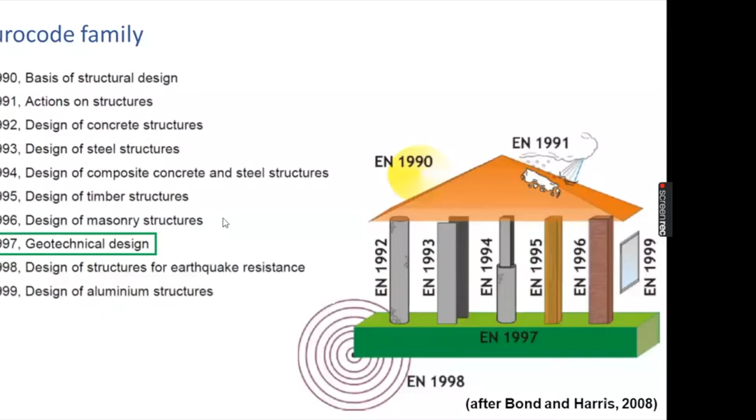So EC7, as I said earlier, is based on the limit state design philosophy. The previous design approach that we are quite familiar with is called the working stress method. In the working stress method, the resistance is calculated, estimated, and a factor of safety is applied to obtain the allowable stresses. But in the limit state method, the design approach is different. Material parameters, and what we call loads in EC7 as 'actions' - that is the terminology used - are given proper weightage by applying partial factors for permanent actions. Variable actions are given different weightage by applying partial factors, and the loads or actions are increased using the partial factors.

Then the resistance, in the calculation of resistance, for example the bearing capacity, the material parameters are reduced by applying partial factors. The factored material parameters are used in a calculation model or equation to obtain the design resistance. Design resistance is compared with what we call the design effect of actions, which is like the combined load, factored and combined. So these two are compared in the limit state method.

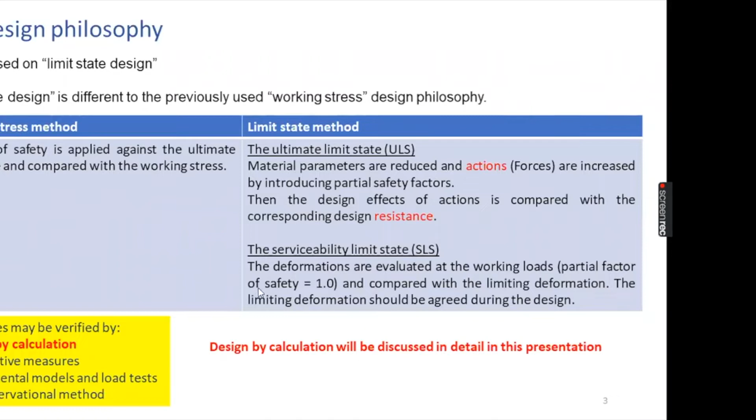There we have to verify the limit states. There are a few limit states: loss of equilibrium, called EQU or equilibrium limit state, and structural and geotechnical limit state. This is what we are going to discuss today.

This loss of equilibrium comes under overall stability. In addition to that, uplift and ground heaving are also there. For structural and geotechnical limit state, there are three design approaches given in EC7.

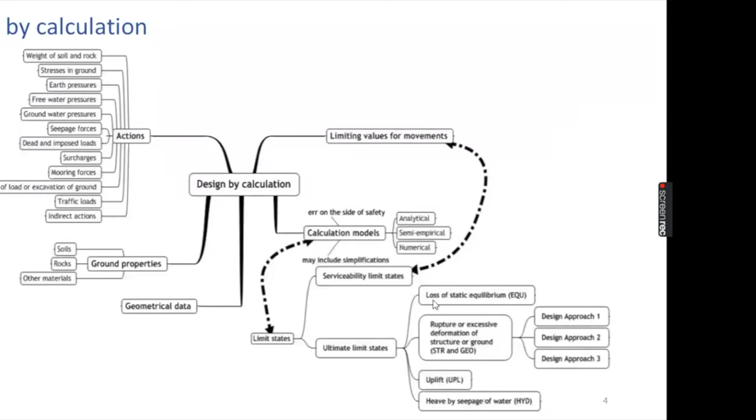So all the actions - the weight of foundation, weight of soil, and the imposed actions - are given the relevant partial factors. The loads are increased to obtain ED, the design effect of actions. I will be using this term frequently through this lecture.

Then we have to characterize the ground and obtain the design material parameters. First we have to obtain the characteristic material parameters. After characterizing the ground, then apply partial factors to obtain the design material parameters. These design material parameters are used in calculating the design resistance, and these two are compared.

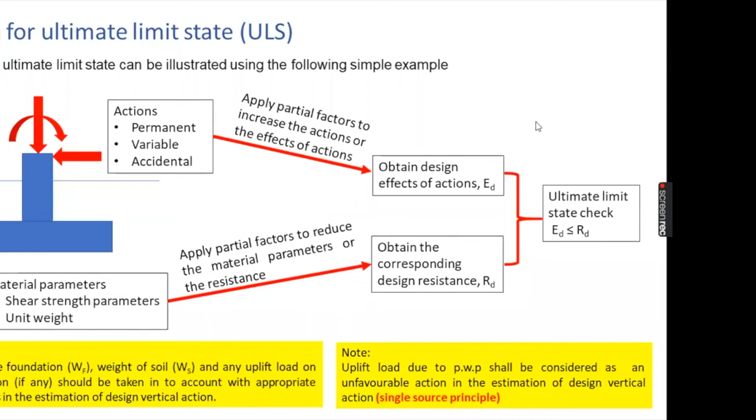There can be freezing and thawing induced loadings. Down drag means the negative skin friction in piles. So there can be so many actions.

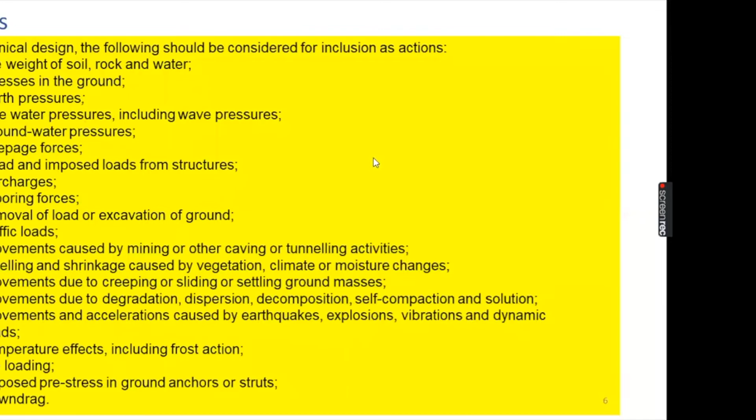As I have explained, there are 5 limit states to be satisfied: the equilibrium, the loss of equilibrium of the structure. Then comes structural and geotechnical limit states. Structural means internal failure or excessive deformation of the structure or structural elements. Geotechnical means failure or excessive deformation of the ground. So these two are taken together in the design of shallow foundations.

So in addition to that, we have uplift, coming from the buoyancy forces. Then in addition to that, if the foundations are, say you can think of a deep excavation. If the foundations are constructed at the bottom of a deep excavation, there can be heaving, hydraulic heaving, piping and so on, the hydraulic related failures.

So we have to consider those aspects as well. In addition to these, the overall stability, particularly if the foundation is resting on a sloping ground, the overall stability should be checked, and the serviceability limit state also has to be checked for all the geotechnical structures.

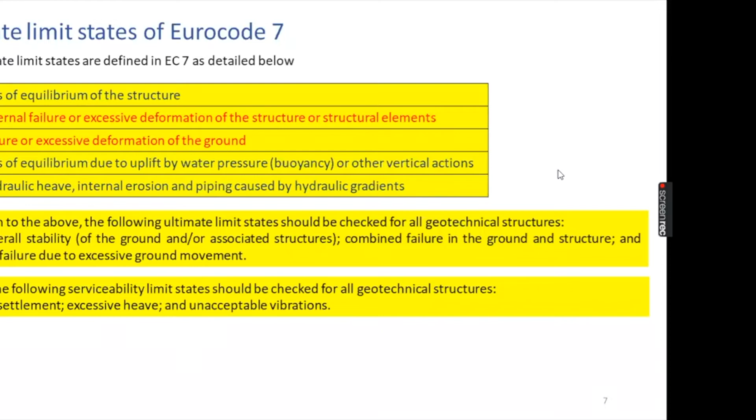So the design calculation, it's all about the loads or actions and material properties. As I have explained, first we have to obtain the characteristic loads. Then we multiply by the partial factors and obtain the design actions. Similarly, we modify the material parameters to obtain the design material parameters.

Dimensions also have to be modified in some cases, mainly for retaining structures, and for foundations subjected to eccentric loads, we have to modify the dimensions. I'll come to this with an example later. Then we obtain the resistance and compare the resistance with the design effect of actions, or we can call this the combined load, total combined load.

For design verifications, there are 2 parameters. One is called over design factor, that is RD over ED ratio, given by tau. Then the degree of utilization, delta, it's the reciprocal, 1 over tau, ED over RD ratio.

After we calculate RD and ED, these two can be calculated and the design verification can be made. For a satisfactory design, the resistance must be larger than the effect of action, so this tau value must be greater than 100%. The delta value must be less than 100% for a satisfactory design.

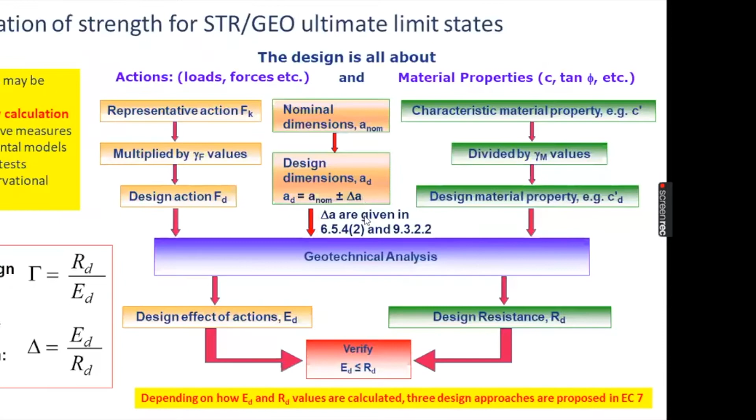So now let me move on to these partial factors. So these are the partial factors proposed in EC7. I will be coming to this again in the coming slides. We will be repeating the same with the examples as well.

So for the actions or the loads, these A1 and A2 partial factors are proposed. You can see two different sets, one for permanent actions given by gamma G, and variable actions, gamma Q. Again, the permanent and variable actions are categorized into favorable actions and unfavorable actions. At the top you can see unfavorable, at the bottom favorable.

So gamma G means unfavorable. Unfavorable means if we are interested in estimating the bearing resistance, bearing capacity, then if whatever the applied action is unfavorable for the bearing capacity, we have to select one of these factors increasing the load or action. If some action is favorable, that means it tends to reduce the applied action, then we can think of using gamma G favorable. Similarly, for variable actions also, gamma Q favorable and gamma Q unfavorable.

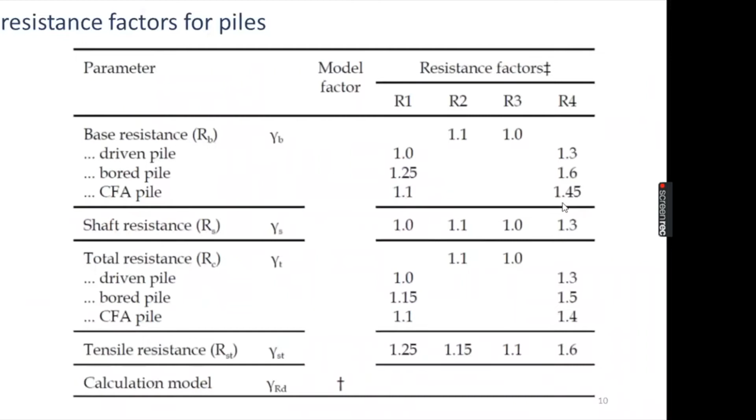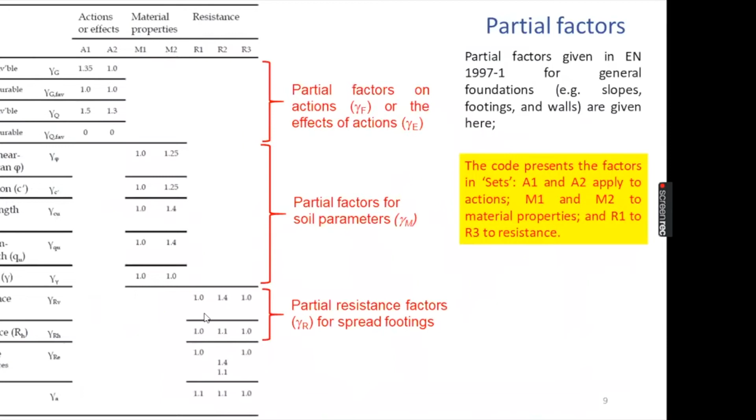In design approach 1 combination 1, right? Similarly, M2, A2 and R1 are given in the previous slide, if you remember. M2, A2, R1 should be used in design approach 1 combination 2.

This general one is the relevant one for shallow foundations. This one is relevant for shallow foundations and earth retaining structures. For both, these general ones are relevant.

Then for design approach 2, A1, M1, R2, and A1 or A2 - there you can see some star sign and a cross sign, I will explain this later. One of these has to be used, along with M2 and R3.

So A1 and A2 - you can see that in design approach 3, both A1 set of partial factors and A2 set are proposed. The star means for structural actions. If the action is due to some structural load, then A1 set should be used. If it is due to some geotechnical load like the backfill, then the partial factors corresponding to geotechnical action should be used, which is A2.

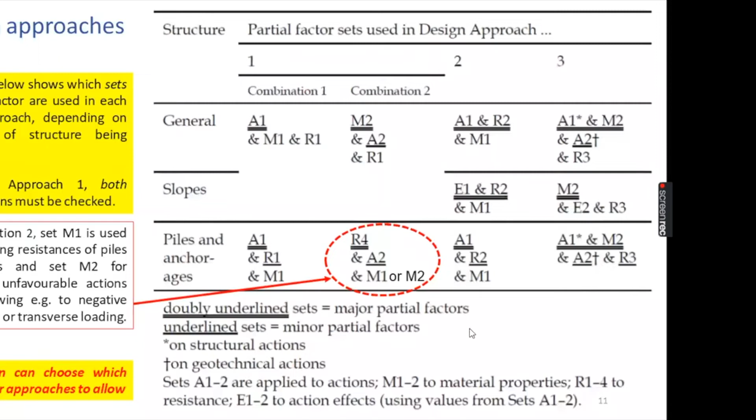If you carefully go through these partial factors, you can see that in design approach 1 combination 1, permanent and variable actions are increased, but material properties are not increased - they are basically unfactored. The same concept is explained here. You can see these are the representative actions, unfactored loads, and this is the partial factor for variable actions and the partial factor for permanent actions. So loads are increased.

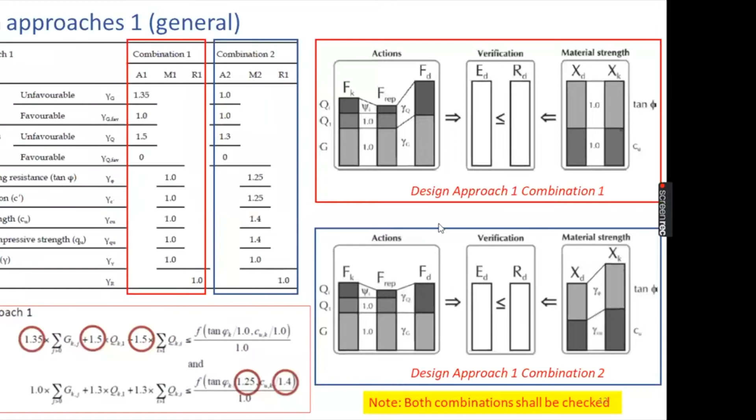I hope you have a clear idea of design approach 1. Similarly, design approach 2: both permanent actions and variable actions are increased. Material parameters are unchanged, but the total resistance is divided by 1.4, like a global factor of safety. In the estimation of bearing resistance, it is divided by 1.4. Material parameters are unfactored. Permanent actions are multiplied by 1.35, variable actions multiplied by 1.5, and the total resistance is divided by 1.4.

So the same philosophy is explained using this illustration. You can see that the loads are increased, material properties are unchanged, but once you obtain the resistance, it is reduced. The factor is applied here, and then the comparison is made. I hope it's clear.

There's a question: are accompanying variable actions also reduced by the reduction factor? It's not reduced, it's increased. Okay, increase, yes.

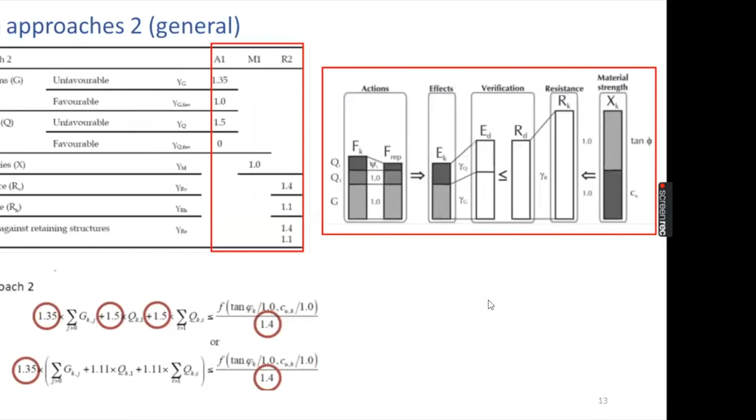Design approach 3. Let me explain it using the governing equation. For structural actions, these are the permanent structural actions and variable structural actions, like weight of the foundation, or surcharge coming from a structure, and so on. Those are all called structural actions. If you are not quite sure what to use, it's always conservative to assume the action as a structural action, because a higher partial factor is used for structural actions. So the permanent structural actions are multiplied by 1.35 because A1 set is used, and the variable ones are multiplied by 1.5. All are unfavorable because we are interested in the bearing resistance.

Then geotechnical actions: if there are any geotechnical related actions, permanent geotechnical actions are unfactored, multiplied by 1. Variable geotechnical actions are multiplied by 1.3, this is the primary one, and accompanying ones if there are. Then we obtain the total, and the material parameters are also factored. For friction angle, 1.25 is used. For undrained cohesion, 1.4 is used. Then the bearing capacity equation is used to obtain the bearing resistance, and the total resistance is divided by the partial factor for resistance, which is equal to 1.

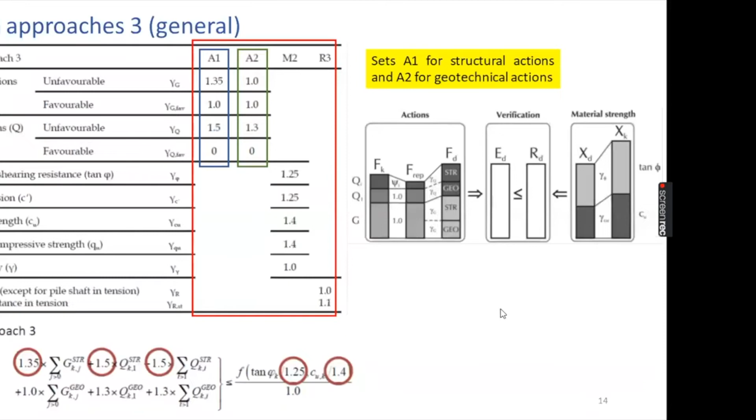So I hope now you have a clear idea about the 3 design approaches. The selection of whatever design approach to use for the design is a national choice, and you can see in Europe different countries select different design approaches. In the UK, we have been following BS codes, and they use design approach 1. In design approach 1, the calculations are a bit complicated because you have to check for 2 combinations, combination 1 and combination 2.

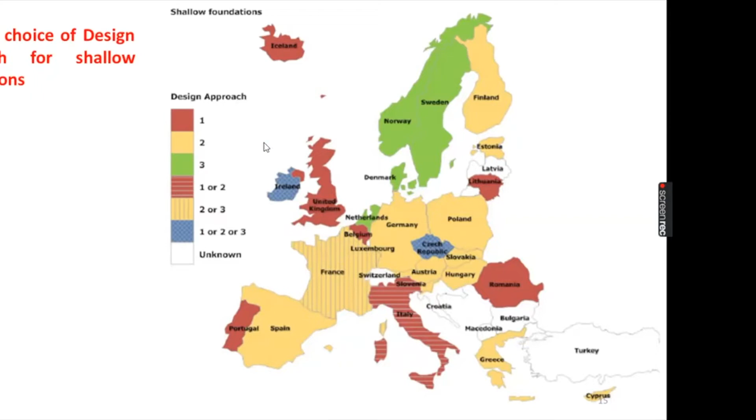So in addition to the bearing resistance, there can be other limit states like loss of stability. This bearing is the one we have been talking about. There's sliding, there can be structural failure, and there can be a combination of structural and geotechnical failure. So these are the different types of limit states for shallow foundations.

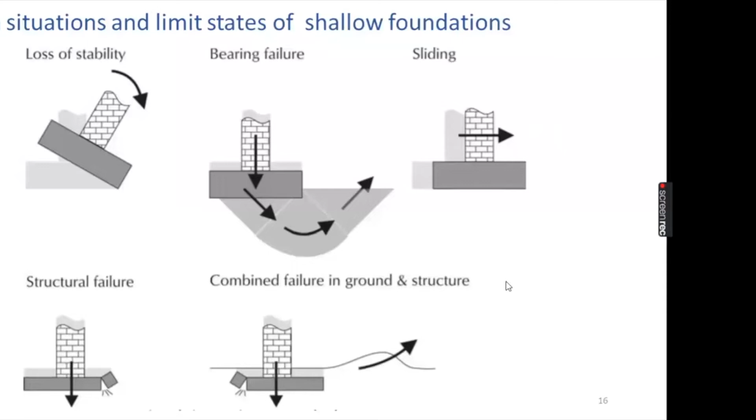Some guidelines are given for geotechnical investigations related to shallow foundations. The depth of investigation below the bottom of the shallow foundation footing should be the greater of two values, for strip or individual square pad footings. You can select the largest, say for example the anticipated footing width times 3, or 6 meters, whichever is the largest value should be used as the minimum depth of investigation as per EC7.

For raft foundations, it's 1.5 times the width. If a raft foundation is anticipated, the investigation shall be carried out up to a minimum depth of 1.5 times the width of the raft. So that is the guideline given.

If a rock or a competent strata is encountered, that becomes the limiting depth. We can terminate the investigation there, at the very hard rock. This is not available in EC7, but I just include it to give you a guideline on the interval of investigation points, the borehole location.

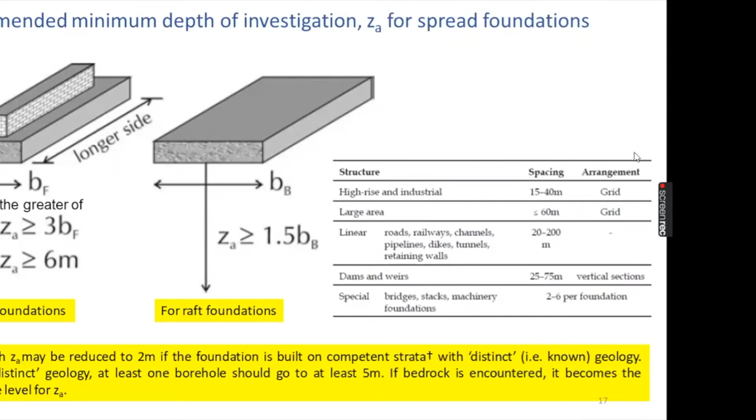So this I have already explained. It's like a summary of what I have already explained, how to estimate the design effect of actions and how to calculate the resistance. I have already explained this, so I will skip this for the moment.

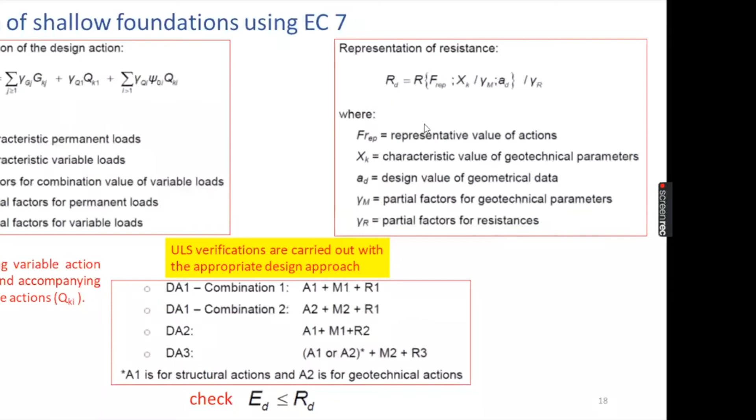So in EC7, for the estimation of the resistance, I told you that there is an F into material parameter. This F is the bearing capacity equation. So in EC7, these two equations are proposed.

For undrained condition, that means if the foundation is constructed on clay subsurface, if we are interested in the short term behavior of the foundation, we have to do the check for the short term condition, then undrained parameters must be used. This is the appropriate equation.

The resistance R over A dash, this is the effective area, is given by this particular equation. You can see this is the design undrained cohesion Cu value, and BC, SC, IC are the base inclination modification factor if the base is inclined like this. If the base is inclined at an alpha to the horizontal, then we have to calculate this base inclination factor, the base inclination modification factor. Then SC is the shape modification factor.

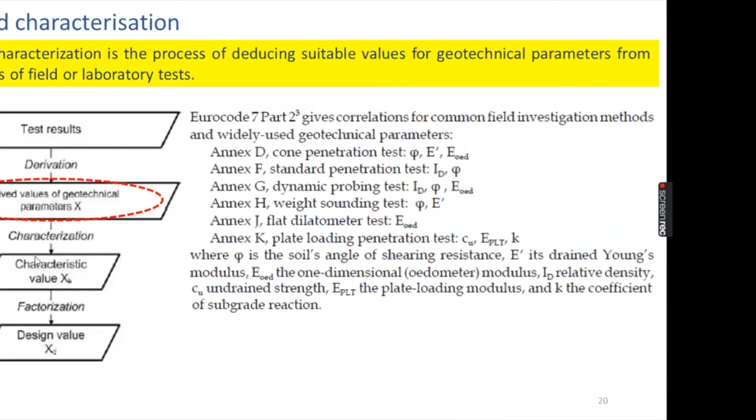Now, in order to do this characterization and obtain the 95% confidence value, a lot of test results must be available, right?

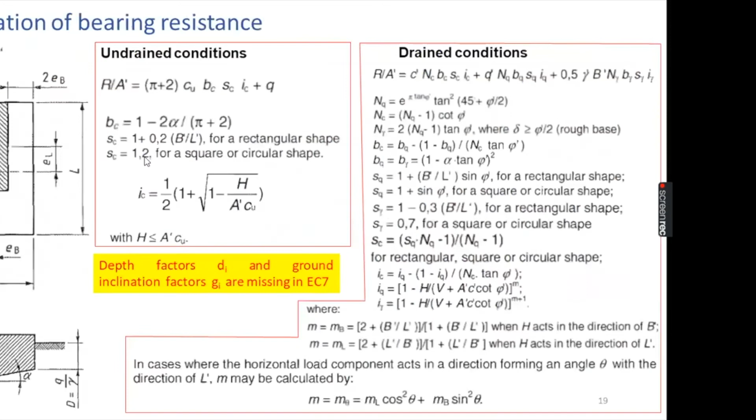So the derived values can be obtained. I will give you some very commonly used tests and show how to obtain the parameters from those tests.

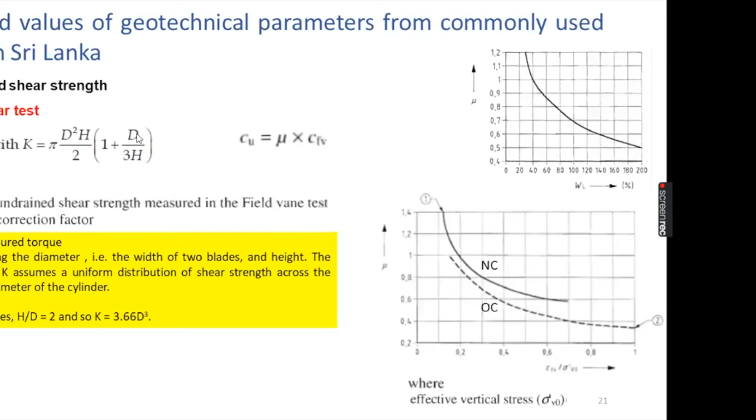The vane shear test is widely used to obtain the undrained cohesion of clay type soils. This is the equation used, with the dimensions of the vane.

Then comes the standard penetration test, widely used for undrained cohesion. The Stroud and Butler correlation is widely used; this is an empirical correlation.

Cu over N values are plotted against the plasticity index, and in most design offices we use Cu over N equals 5.

As the empirical correlation for obtaining the undrained cohesion of clay.

Please keep in mind that this Cu value is the derived value, right? Similarly for CPT, the cone penetrometer test, Su is identical to Cu, it's the same; this equation is used.

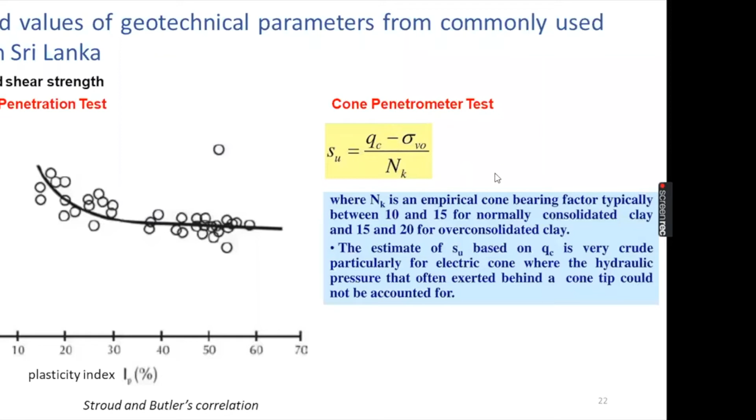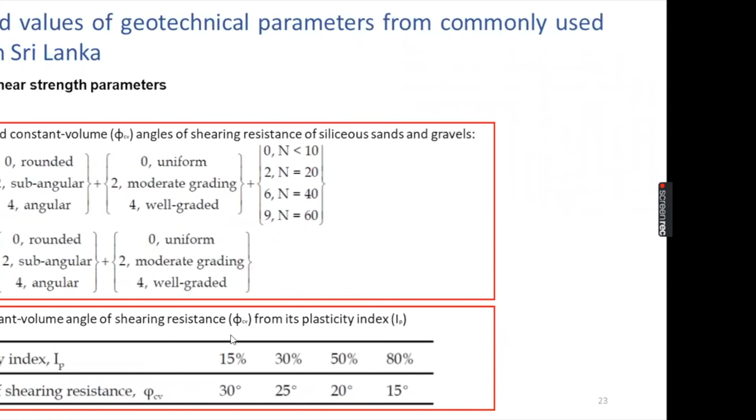For clay soils, this is another empirical correlation. For purely clay soils, the drained friction angles, again constant volume. In addition to that, we can use the CPT test for obtaining the friction angle, and this is for friction angle again. Then the E values, the stiffness values, elastic modulus values, can also be calculated using the CPT correlations. There are so many such correlations for SPT as well.

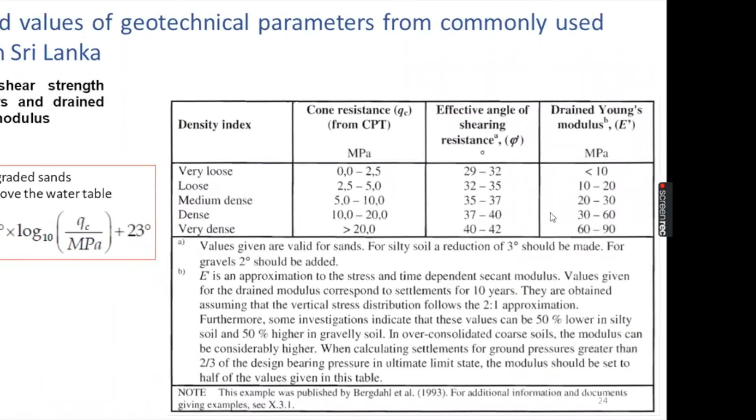So then how do we get the characteristic value? All the test methods that I have discussed give the derived values of geotechnical parameters. From the derived values we have to obtain the characteristic values. The most appropriate or recommended method is to carry out a statistical analysis. If you have a lot of data, obtain the 95% confidence value as the characteristic value.

But in Sri Lanka we know that we don't do a lot of laboratory or field tests. So then the only option available would be the cautious estimate. This is where experience comes into play. From the derived values we cautiously estimate the characteristic values, and these values are factored.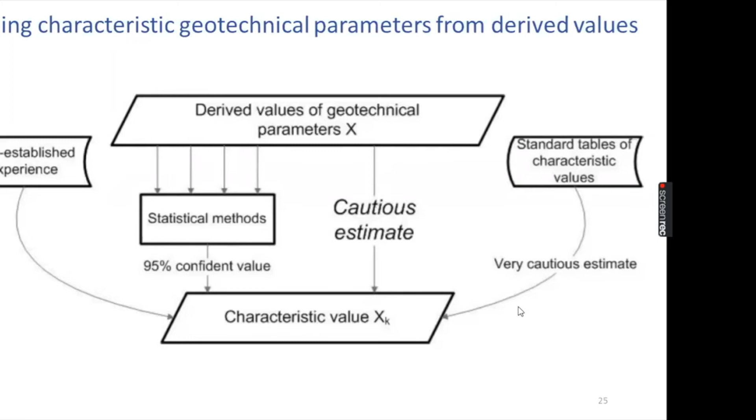Now I would like to explain a few design examples. This is a very typical straightforward case where you have a rectangular footing 1.5 meter by 2.5 meter. Let's assume the foundation is placed at a depth of 0.5 meters. The imposed loads are given here: the imposed variable action, Q, is 450 kilonewton, and the permanent action is 800 kilonewton. We have to consider the weight of the footing and the weight of the soil above. If the water table is here, we have to even consider the uplift, which is given in these two notes.

So then we are asked to do the design check. The material parameters, the characteristic values, are given here. From the derived values, characteristic values are cautiously estimated and given here. The characteristic unit weight here is the concrete characteristic unit weight. The friction angle, characteristic friction angle, is 35 degrees. Cohesion is taken as 0, since it's sandy soil. Then the unit weight of soil is 18. Nothing is mentioned about the water table, so we assume the water table is well below the bottom of the footing.

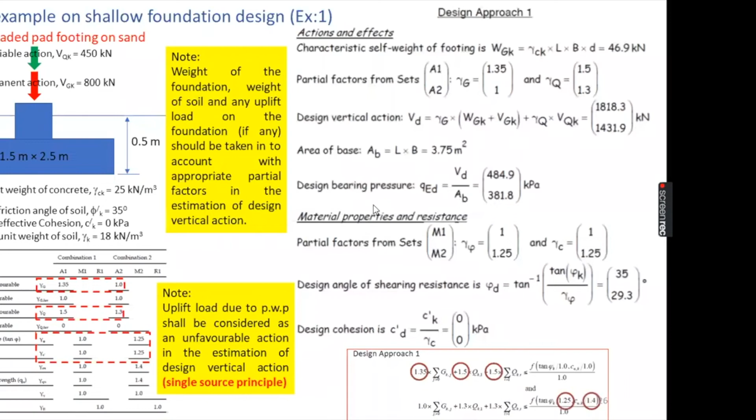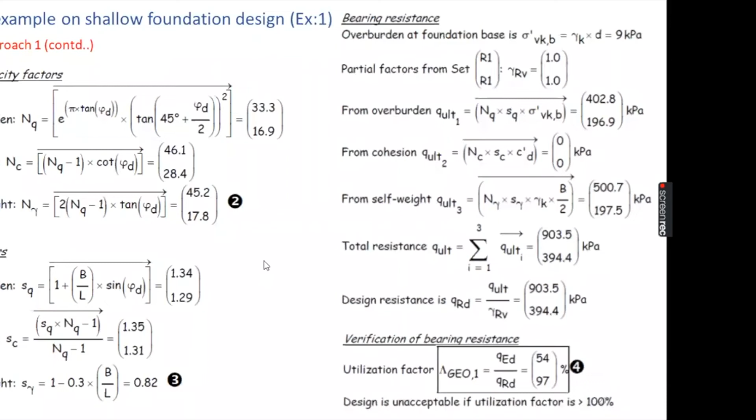The design approach 2, same example, design approach 2. So I think now it's very straightforward. I don't have to explain this in detail. Only the factors are going to change. Okay, so simply follow this equation.

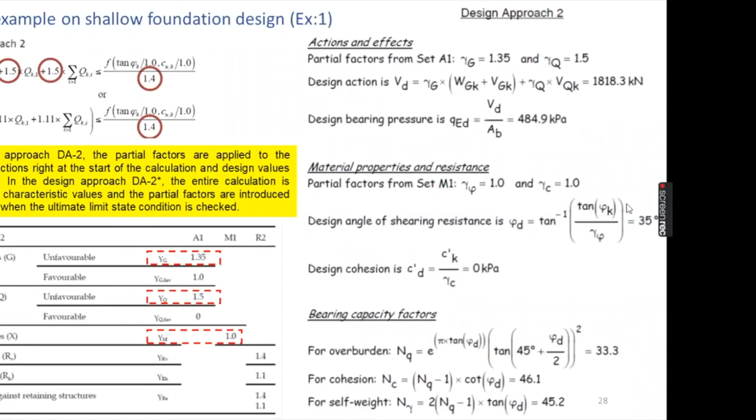Then calculate the resistance. Once you calculate the resistance, you have to divide it by 1.4, applying a global safety factor. The material parameters are unfactored, so no need to modify them. Design friction angle equals the characteristic friction angle, 35 degrees, cohesion 0. Calculate the bearing capacity factors using the design friction angle for approach 2, then calculate shape factors as before.

The C term, Q term, and gamma term in the bearing capacity equation have been estimated. Take the summation - this is the total resistance. Now once you obtain the total resistance, you have to divide it by gamma RV, the partial factor for resistance, which is 1.4 here. This gives the design resistance, which you can compare with the design bearing pressure.

It is 75%, which is less than 100%, so the design is acceptable.

There's a question asking whether we are supposed to do all the design checks in Sri Lanka. Actually, we have not yet adopted Eurocodes for geotechnical design, so it's not very clear at the moment, but we don't have to do all 3 design checks - it's not done anywhere in the world. There is a national choice; a national annex has to be prepared, giving clear guidelines on which approach to use, and we have to stick to that approach.

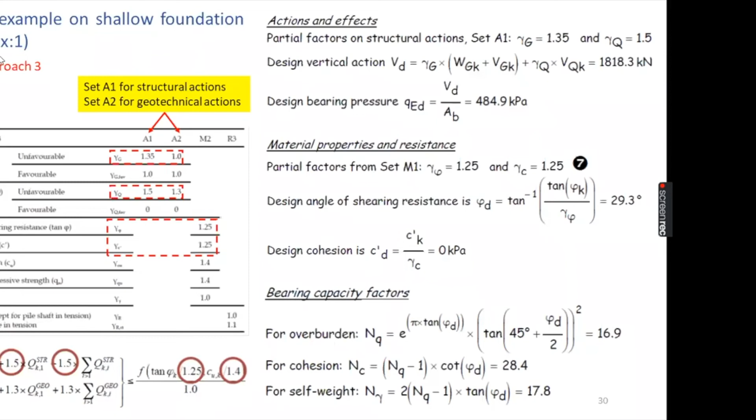Once you obtain the design friction angle, you can calculate the bearing capacity factors NC, NQ and N gamma, and obtain the total resistance divided by the partial factor for resistance, which is equal to 1 in design approach 3. So shape factors, the C term, Q term, and the total resistance divided by 1.

This is quite interesting. According to design approach 3, this design is unacceptable - it's greater than 100%, the utilization factor is greater than 100%. Therefore this design is unacceptable in some countries, where it is acceptable in some other countries. Can't help it.

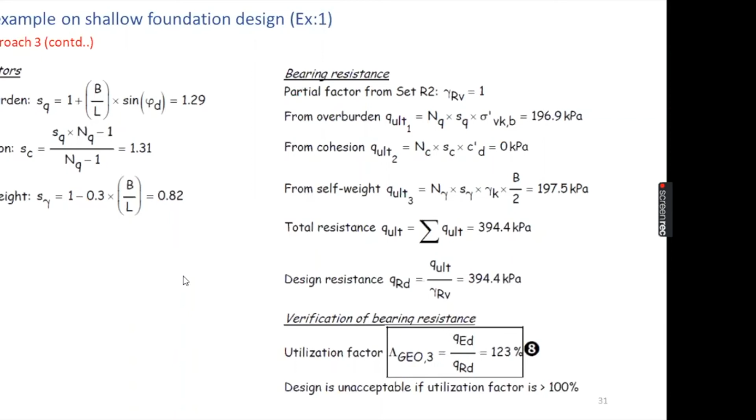Right, another example, a bit more complicated. I don't know about the time. Engineer Manjula, can you please... Yes, you can continue. It's okay. I'll try to finish as quickly as possible, because now I have explained the concepts - I think I can go faster.

This is another example with a foundation subjected to moments. When you calculate the eccentricities by considering only the imposed loads, you get 75 millimeter and 100 millimeter. These two eccentricities are calculated only by considering the imposed loads, the permanent one and the variable one - whatever the moment divided by the vertical load gives this. It doesn't take the weight of the foundation or uplift or anything into account.

Therefore, the first thing we are supposed to do, since these eccentricities are calculated only by considering the imposed loads, is to modify these eccentricities and obtain the design eccentricities. That is the first thing to be done. So that calculation is explained here, how to obtain the design eccentricities.

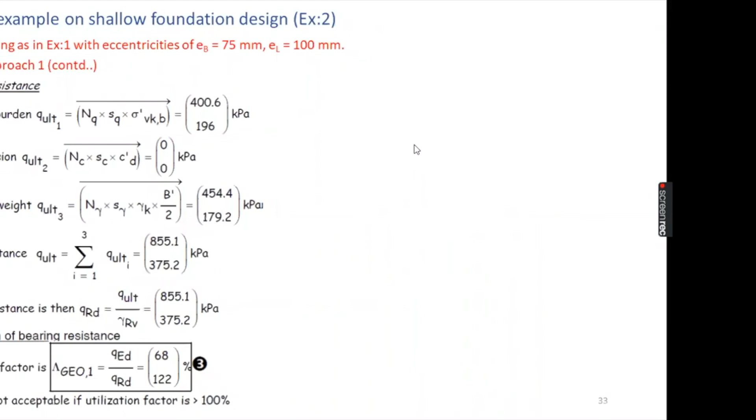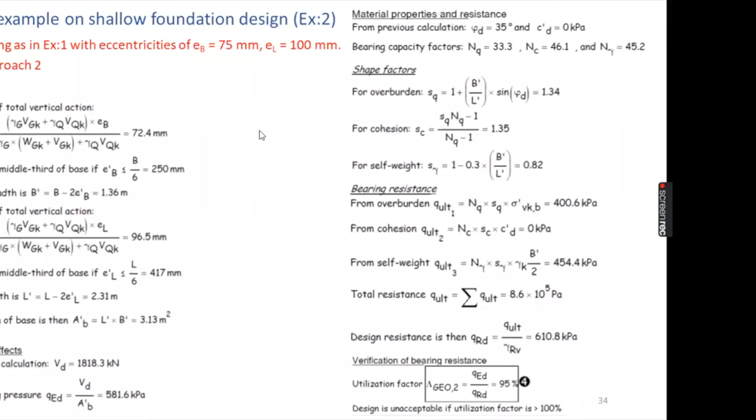Similarly, we can do the calculation for design approach 2 as well. The only difference being the change in the partial factors. Partial factors are different, the calculation procedure is identical. So I think I can skip this.

Similarly, for design approach 3, the only difference is the difference in the partial factors, and if there are geotechnical or structural actions, you have to separate and apply separate partial factors, but in this case it's not relevant. All the actions are considered as structural actions, so the estimation of the design effect of action, design bearing pressure, is identical.

So the only thing you are supposed to know is this modification to the eccentricity - eccentricities have to be modified by considering the weight of the footing and the factors.

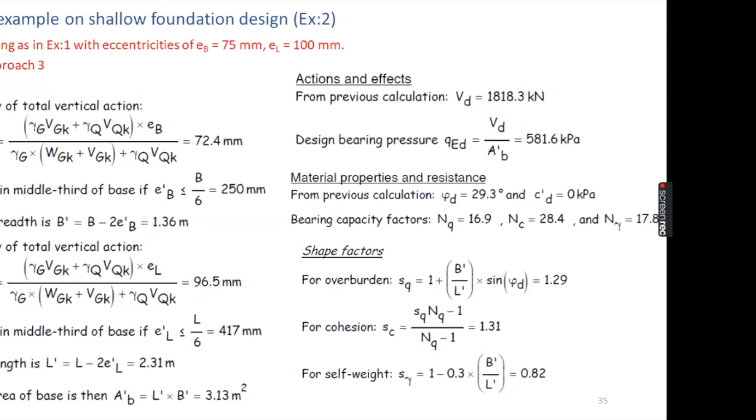Finally, this is again strip footing on clay type soils. There's another example quite similar to the one I discussed, only the material parameters differ. For clay soils we have to use undrained parameters, since short term is critical for foundations on clay most of the time. So undrained parameters have to be used in the estimation of bearing resistance. The estimation of the design bearing pressure is almost identical to the previous example.

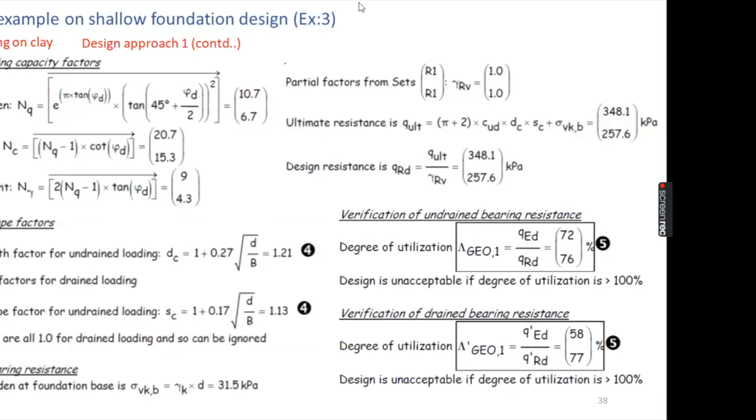Use the undrained cohesion, this characteristic undrained cohesion value, apply whatever the relevant partial factor, and do the calculation. Now in the estimation of bearing capacity you have to use a different equation. If you remember, in EC7 I showed you a slide with two equations for estimation of resistance: one for undrained condition, one for drained condition. This undrained one should be used.

Then another calculation: if you're interested in doing the calculation using effective parameters, the long term bearing resistance of this footing, we have to use the effective cohesion and effective friction angle. If we are using effective values, we have to take the uplift force into account, because the water table is above the base. So in this kind of situation, during site investigation, the water table is observed at a depth of 1 meter.

It is always conservative to assume that the water table can rise up to the ground level during the worst case scenario. So assume this water table is at the existing ground level and do the calculation. It's always conservative. And the water table applies an uplift force.

So when you calculate the design resistance, design effect of actions, that is design load: permanent action, imposed variable action, weight of the footing, the soil, and the uplift. Uplift is acting in the opposite direction, so you have to deduct it. Deduct the uplift load, but the uplift load also has to be factored.